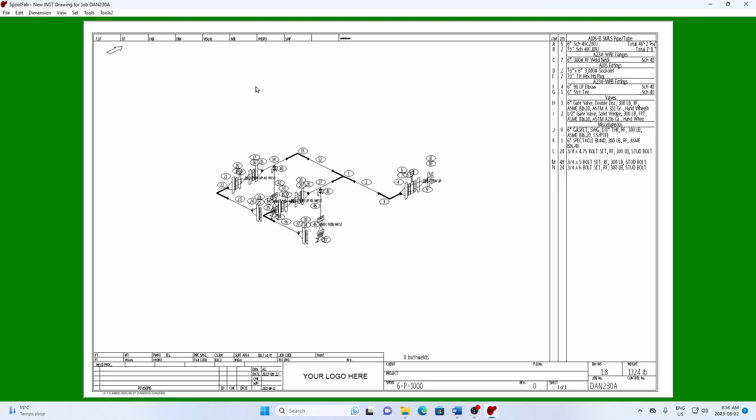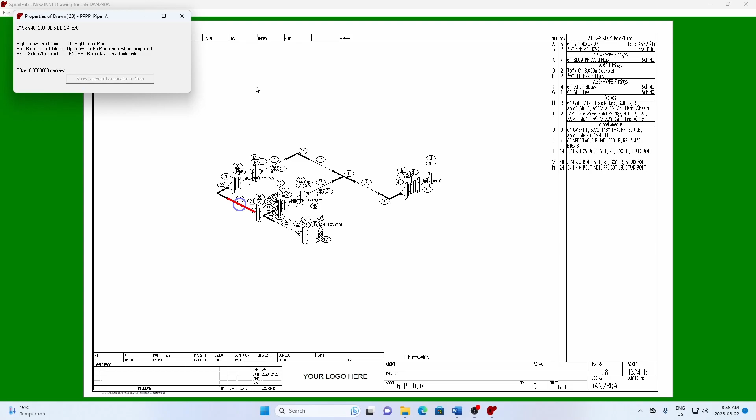This blue circle shows the focus, so if I go Ctrl right arrow on the keyboard, that moves to the next pipe. Then I press the up arrow, and it'll make that pipe longer, or make it import longer the next time we import it. Then Ctrl right again, and up arrow, make this one longer. Ctrl right, make this one longer. And this one not much. And this one probably a bit longer as well.

Now I'll press Enter, and it institutes those changes. We can add to the changes because they're cumulative, so I'll press Ctrl J again. Ctrl right, Ctrl right, Ctrl right. I want this one to be longer. And I'd like this one longer as well, and also this one. So I'm pressing Enter.

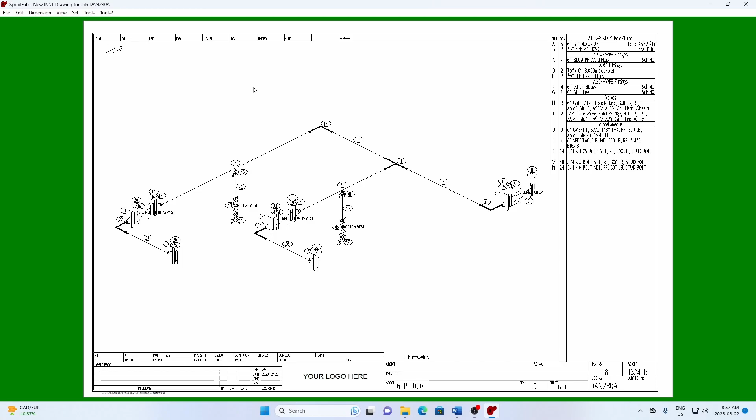And that looks fine. I'll show the dimensions now. Dimension, show all dimensions. We'll need to move some of these dimensions out of the way. We can also hide some of them. Let's hide the fitting dimensions so we have fewer to work with.

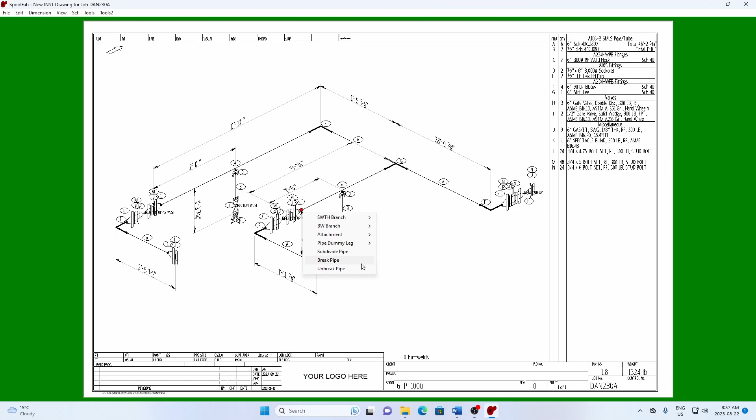And then we'll move this one over to, let's say, here. Where else should we move these? I'll move this one to here, and this one down to here. This one we could have down there. And I think, no, we don't need to. We don't need to make a branch there. I'll move this one over here. And this one's all right. These ones can stay as well.

Okay, and now this is ready to split into spools, so I'll just file Save As. We'll call this one number 4.

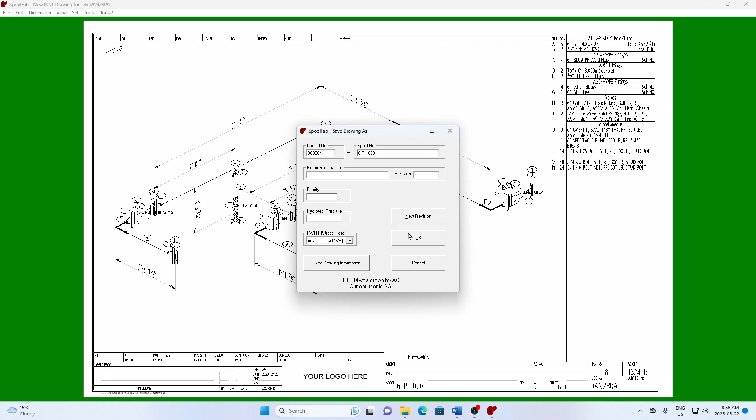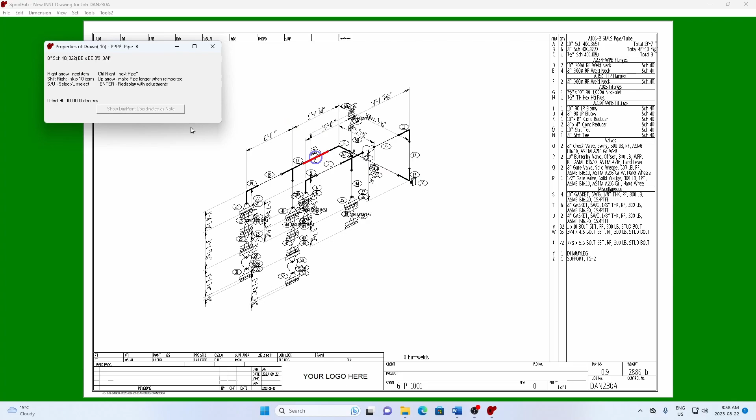Now we'll bring in the next PCF, the second one. It also needs to be expanded a bit. So we'll go Ctrl J, Ctrl right, make these a bit bigger. This one needs to be quite a bit bigger, and these as well. And then press Enter. Now we get a better idea what's going on.

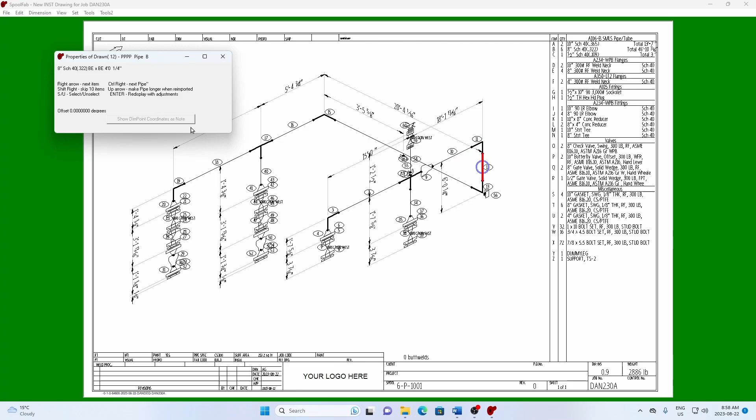Ctrl J again, and that one's all right. That one should be longer. And I think that one ought to be longer too, just to keep them apart. That's okay. And the dimensions look all right, except that this one's a bit in the way. I'll move it down. I'll move this dimension down as well. These others are all right, they can stay.

We would probably need to move some of these tags around, like this tag is the tag for this horizontal pipe. Well, they're both horizontal. And then let's click on this pipe and hit Break Pipe, and that will make it clearer which pipe is on top. Okay, so this one is ready for splitting into spools. So we'll go Save As, save it as number 5.

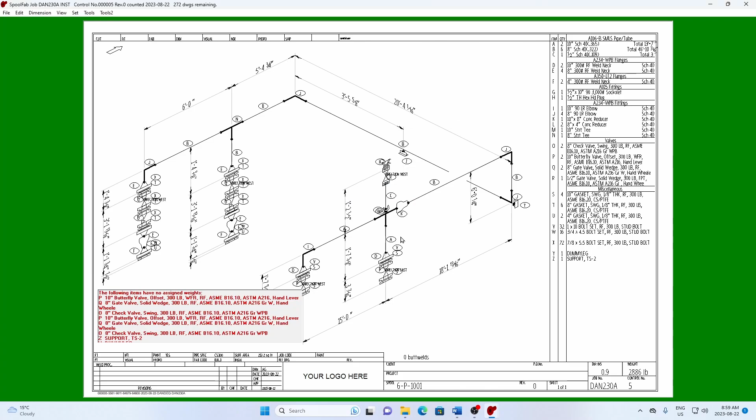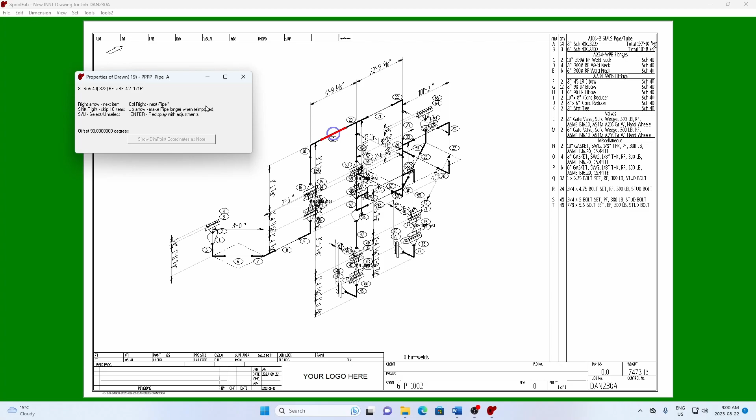And then I bring in the third PCF. That's this one. Again, we need to split it apart a bit, or at least spread it out a bit. Ctrl J, Ctrl right, Ctrl right, Ctrl right. And we'll make that one longer by pressing the up arrow. That one, and some of these as well. That one, and that one. And then Enter.

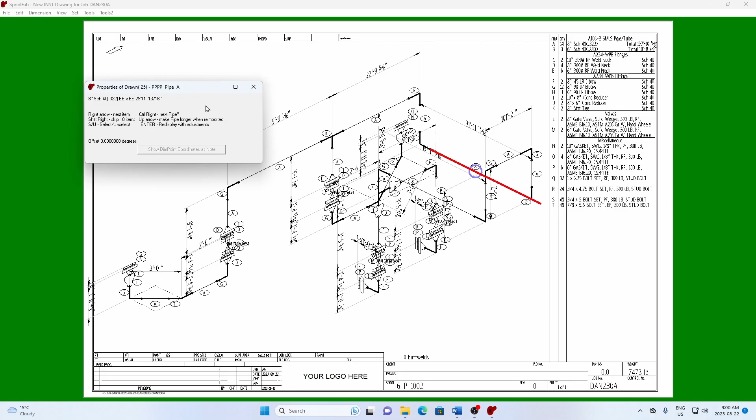Okay, we still need to spread it out a bit more. So I'm pressing Control right again. Let's spread this out a bit more here, and this one more here. Oh, that's better. Now we can see that the various groups of pipes are fairly well defined.

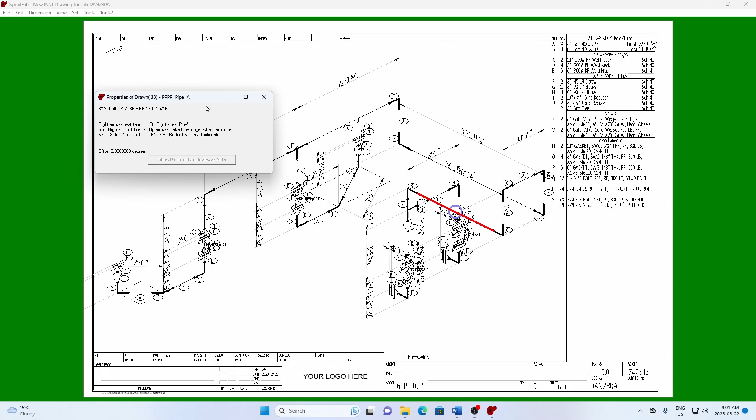I think we can make these longer, just to make them stand out more. And this should be longer so the elbow doesn't interfere there. And let's press enter and see how that goes. That's not too bad. Let's move this dimension from there to there. And we're in pretty good shape here.

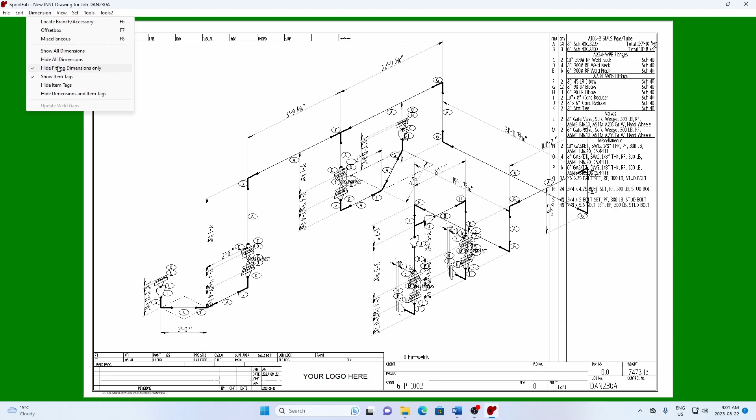If I go Control A, right arrow, enter, I can move these over a bit. But really, actually, we don't really need those dimensions. So we could go hide fitting dimensions, and that'll make it a little more compact. Enter.

Yeah, this will be okay to split into spools, I think. Oh, this could be a bit longer here. Let's go F11, A, and Shift, and we'll move this down a bit. And we could do something similar here.

Okay, so this is good for splitting into spools. We'll go File, Save As, number 6.

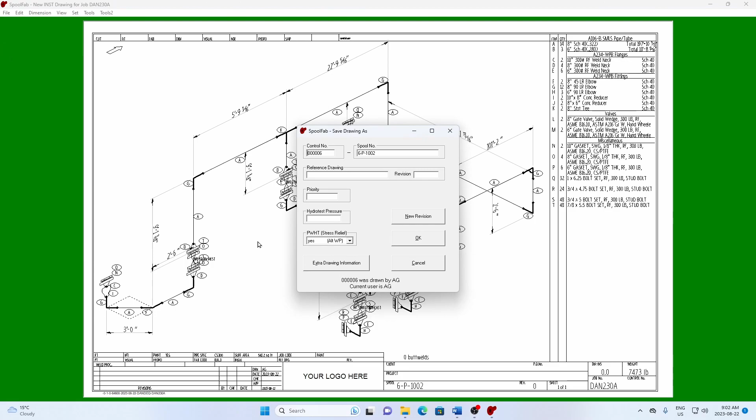There. Okay, so that's how you import PCF files into SpoolFab. Now they're all ready to split into spools, and we'll cover that in the next video. Thank you for watching.